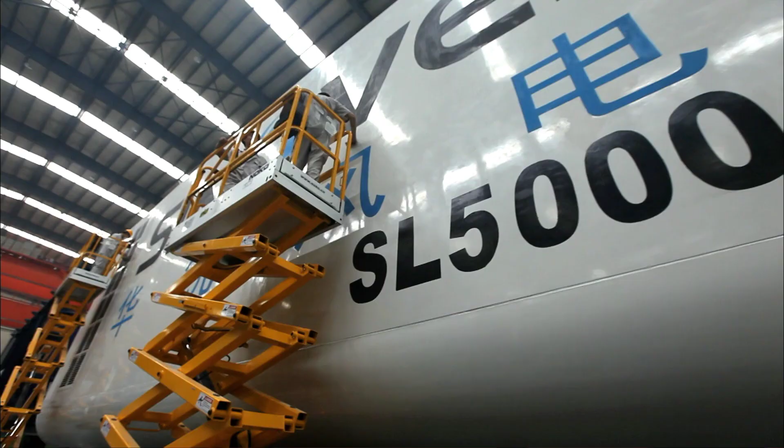Its cabin can be a helicopter pad. Its wind turbine rotor is over 40 stories high. When it's in operation, it doesn't need any fuel, and it won't cause any pollution. In its 20 years of designed lifespan, it will obtain 400 million kilowatt-hours of electricity from the air. This all hinges on it successfully being made and its ability to take on the test of nature.

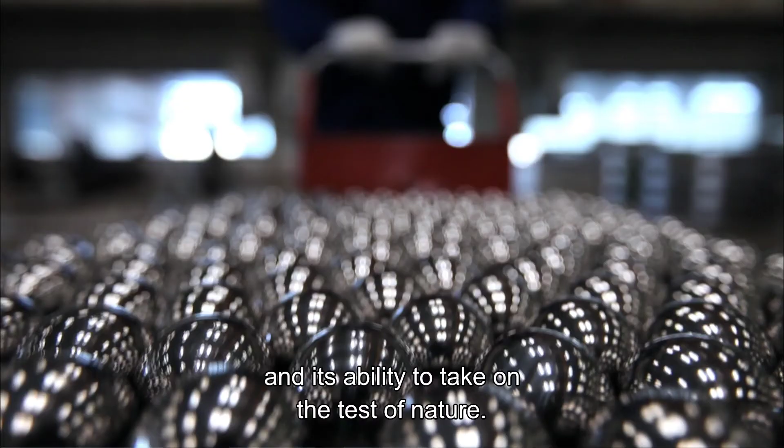This is the giant of wind turbines. Manufacturing it alone has presented all sorts of problems. Installing it during typhoon season on the tumultuous sea will be an unprecedented challenge.

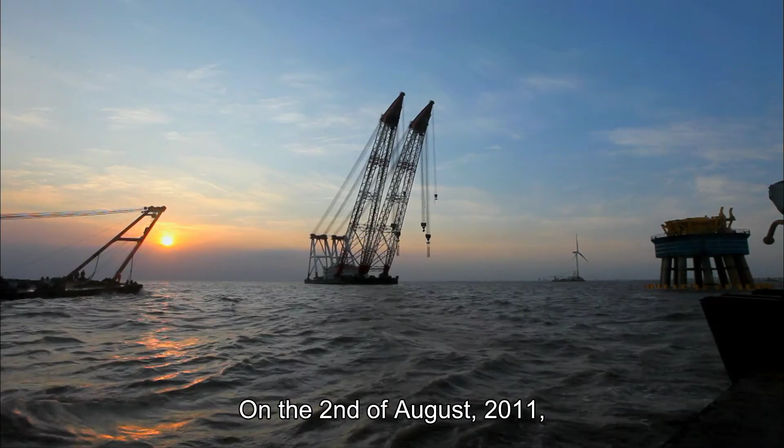On the 2nd of August 2011, on the Sea of Hangzhou Bay, Shanghai, an enormous shadow appeared. This was China's biggest double floating crane, the Fengfan. 38 nautical miles out, on Yangshan Island, China's largest self-propelled crawler crane has been waiting for a long time. Together, they would be challenging an unprecedented installation.

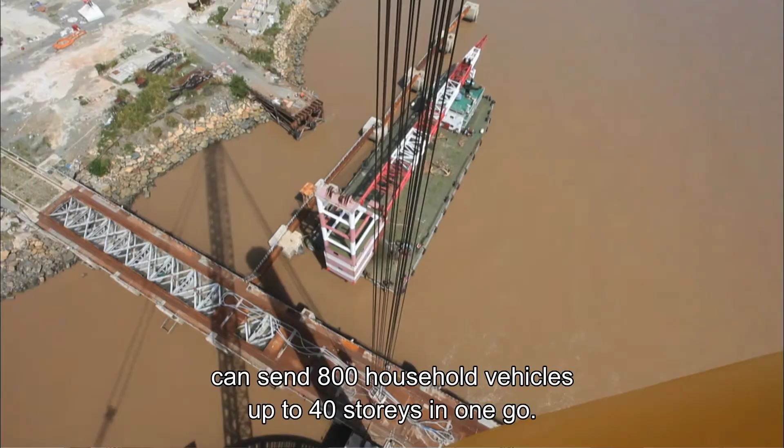Zheng Xijie, the operator for China's largest crawler crane. This is a self-propelled crawler crane that is worth as much as a Boeing 737. Its 9,000 horsepower engine can send 800 household vehicles up to 40 stories in one go. Despite his confidence in the crane, Zheng was still feeling a little nervous about this upcoming challenge.

Zheng's crane and the Fengfan would be installing the world's biggest wind turbine, the SL5000, in the waters of Hangzhou Bay during typhoon season. The roiling waters and unpredictable ocean wind would be the biggest enemies of this challenge.

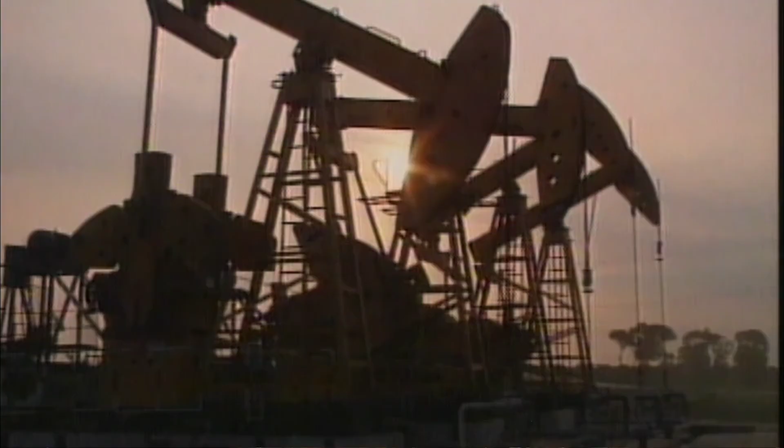Since the Industrial Revolution, the accelerating trend of dwindling petroleum and coal resources has become increasingly obvious. At the rate that it is going, these non-renewable energy resources will soon be depleted. The anxiety over energy depletion has already spread.

Today, developing applicable technology for renewable energy is a priority for mankind. And this demand is particularly high in China, where the economy is under rapid progress.

In 2009, the Chinese started to develop the highly difficult offshore wind power near Shanghai. A year later, the biggest offshore wind power plant in Asia appeared to the east of Donghai Bridge and successfully connected to the grid to generate power before the Shanghai World Expo.

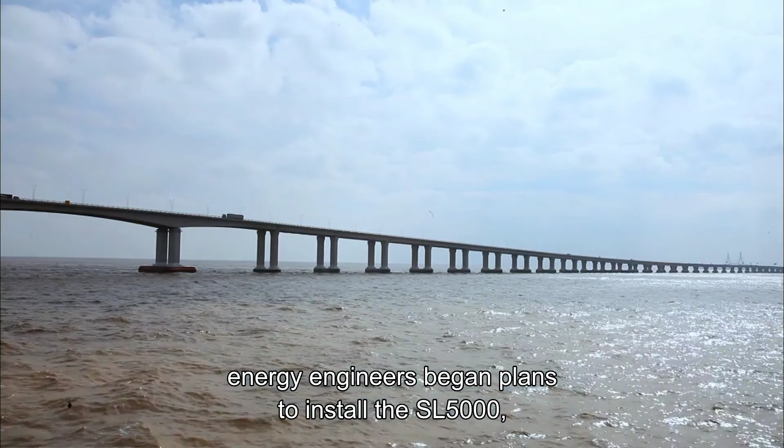However, the ambition of the Chinese didn't stop there. In the summer of 2010, energy engineers began plans to install the SL5000, the world's largest offshore wind turbine, on the other side of Donghai Bridge.

The SL5000 has an enormous body. The top of its engine room can be used as a helicopter landing pad, and its wind turbine rotor has a diameter of 128 meters. Such an enormous size would present an unprecedented challenge for the engineering team, both in manufacturing and installation.

According to their plans, the various components for the SL5000 would be produced in different provinces in China and finally transported to the installation base near Yangshan Port, Shanghai, for assembly.

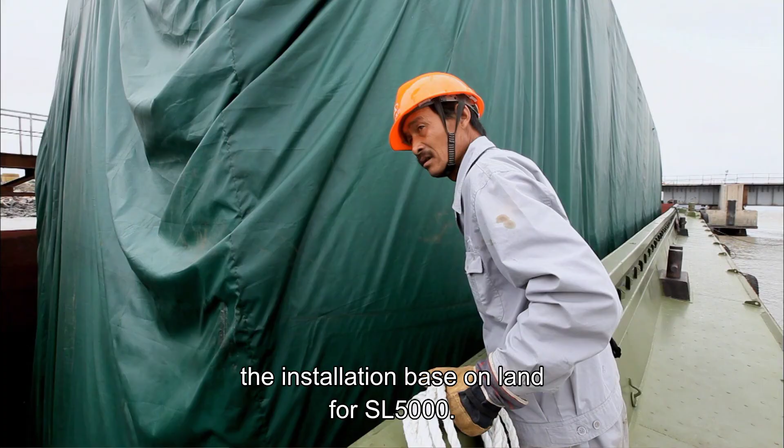August 5th, 2011, the installation base on land for SL5000. The freighter transporting the engine room and the semi-submersible for transporting the SL5000 have arrived at the same time. Based on the information from the meteorology department, the 9th typhoon of 2011, Meihua, had turned into a super typhoon two days before and was heading in this direction.

They must transfer the engine room somewhere safe as soon as possible, while getting the semi-submersible into harbor.

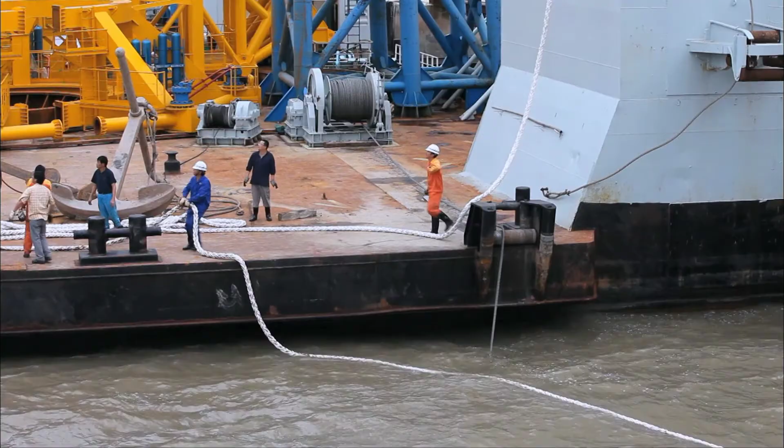To ensure the safety of the gigantic SL-5000 in the transportation process, the engineering team chose to use a bigger semi-submersible than usual. But this decision caused the size of the harbor to become a problem. Two months before, the harbor was completely revamped for this purpose. Now it could just manage to fit in the semi-submersible.

On the other end of the worksite, the engine room remained where it was. At that moment, the weather was deteriorating fast. Are the handles up? The handles are up.

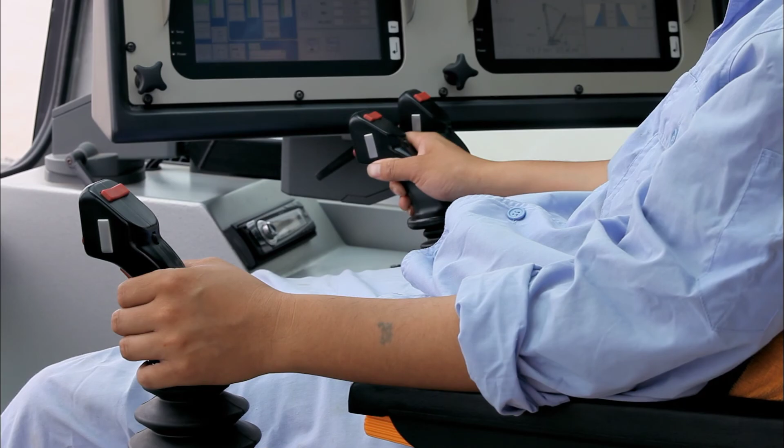Jung assessed the wind situation and activated the 9,000 horsepower engine. Lifting the over 300-ton engine room to transfer it to the railcar isn't difficult for the experienced Jung. But the wind by the sea has already left a deep impression on him. He can't help but be worried about the upcoming official assembly and installation.

Let's go back to early 2011. After half a year of intense collaboration between various departments, the design for the giant of wind turbines, the SL-5000, was finally complete. Soon, the leading companies in the wind power industry together accepted the challenge of manufacturing this giant.

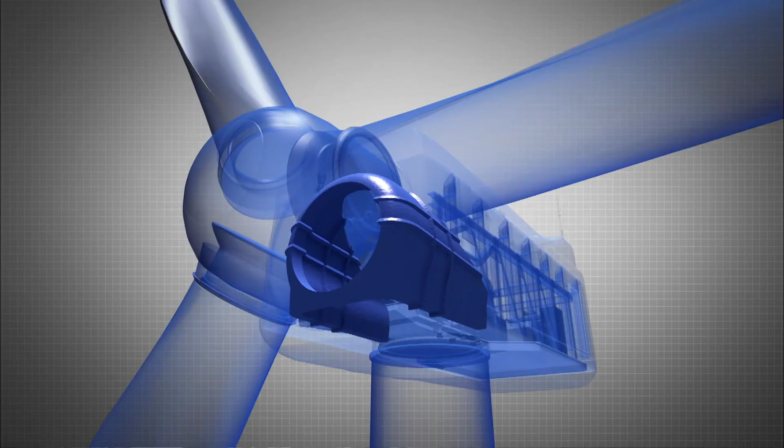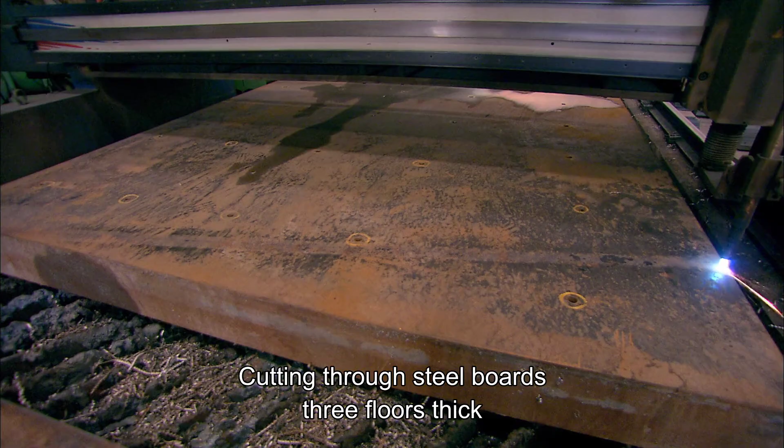To manufacture the large-scale extra-thick steel boards, this heavy-duty cutting machine was necessary. This flame, over 3,000 degrees Celsius, cuts through steel boards like tofu. Cutting through steel boards three floors thick is not this cutting machine's greatest strength. It can precisely cut out any shape designed by the computer.

Its precise control over any discrepancy in the cutting process laid a good foundation for the welding to come. The SL-5000's main frame must be able to support the enormous torque created by the longest wind vane in the world. The quality of the welding must be strictly examined.

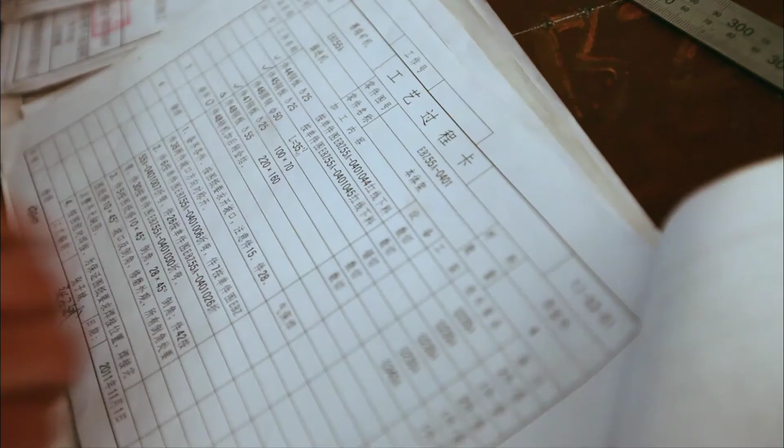The greatest threat to the welding quality was the residual air bubbles at the welding points. Any excessive air bubbles would greatly weaken the mainframe, causing disastrous results.

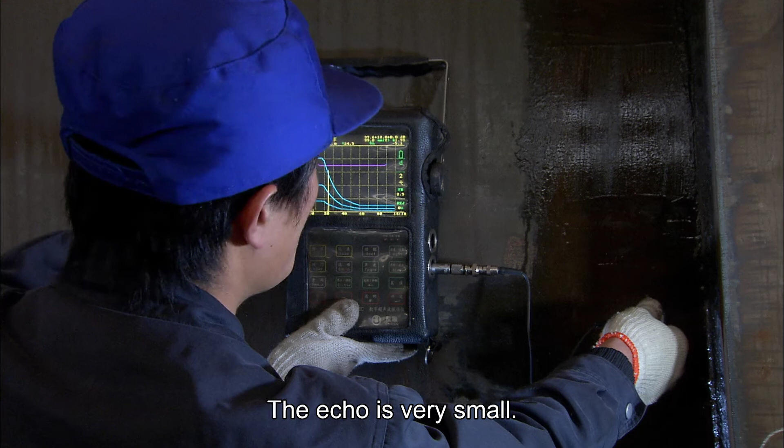This is an ultrasound detector. It is used to examine the interior of metal objects. In order to ensure the quality of the main frame, the detector is tuned to the most sensitive setting. Look, there's an air bubble here, an echo. That shows there's a flaw in the welding bead. When we decrease it by 12 decibels, the flaw becomes very small. The echo is very small, so this passes examination.

All the welding points of the SL-5000's main frame must pass an examination process to ensure it can support the wind turbine, faced with various difficulties in the natural environment.

In creating the biggest wind turbine in history, the completion of the main frame was only the start of this difficult task. More difficult challenges lay ahead.

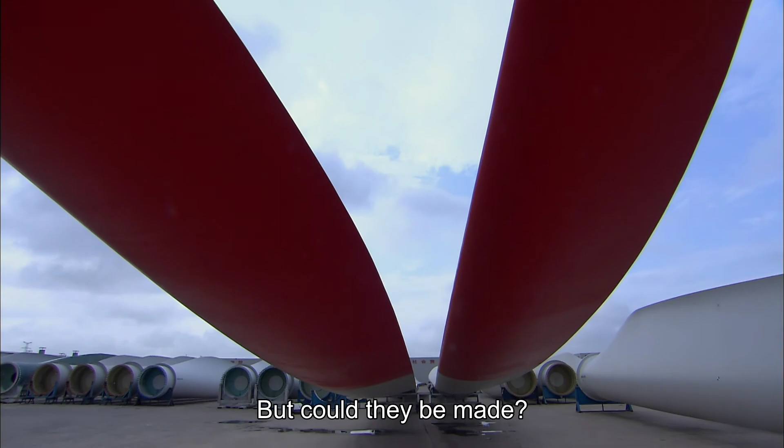To power the large-scale power generator inside SL-5000, wind vanes of unprecedented dimensions were designed. But could they be made? The biggest wind vane manufacturer in China took on this challenge.

Sixty-two-meter wind vanes. We've never manufactured this before, and there's no past cases to refer to. We can only rely on theoretical calculations. No matter the specifications and shape of the vanes, we must meet two basic requirements: the greatest strength and the smallest weight. Yet these just happen to be two conflicting requirements.

Like all design engineers in the manufacturing industry, project manager Dr. Liu Yong must find a balance between these two requirements.

Abnormally strong wind is something wind turbines often face. If the wind vanes are subpar, the result will be disastrous.

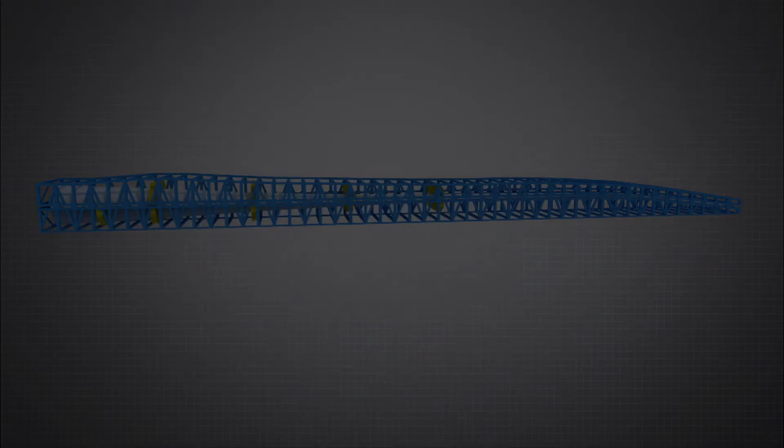The wind vanes for the SL5000 were the biggest, longest wind vanes currently in commercial use in the world. This meant the strain it would be under would also be the greatest. What material could be used to make the vanes to satisfy the demanding conditions?

In the end, the scientists managed to find the ideal material, epoxy resin. After solidification, this material is extremely stable, both chemically and physically. Its only weakness is its tensile strength, which means it is too brittle.

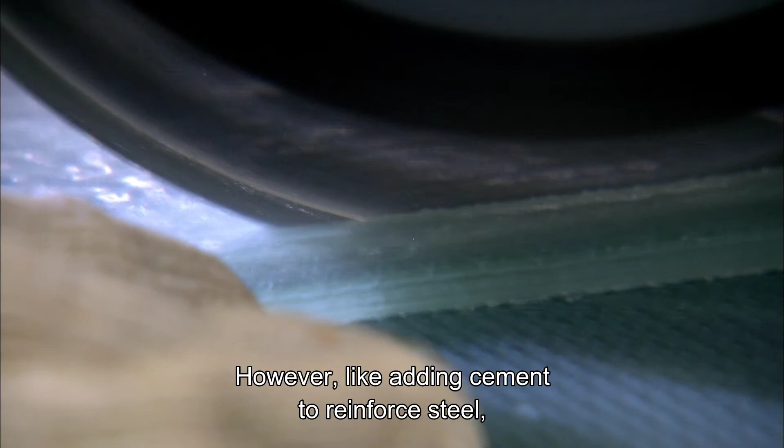However, like adding cement to reinforce steel, scientists added certain braiding to the epoxy resin to create a compound material. This compound material was what we usually call fiber-reinforced plastic, or FRP. How would this added braiding change the property of the resin?

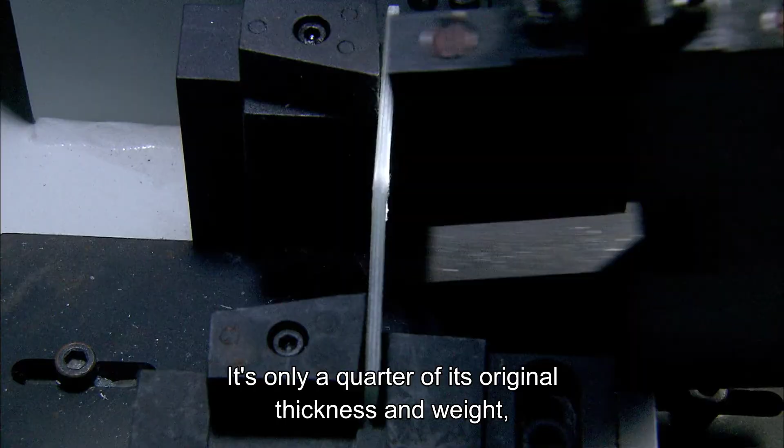It's only a quarter of its original thickness and weight, but it is more than 10 times stronger. Seems like FRP was the best material for making SL5000 wind vanes.

Wind vanes for wind turbines come in irregular shapes. Only then can they perform to their best in terms of aerodynamics. However, the irregular shape, added to the extremely large size, has created two difficult factors that make manufacturing exponentially more difficult.

The most reliable way to confirm if the manufacturing met the design requirements would be to manufacture a wind vane sample for testing as soon as possible.

Six months later, with the help of computers, a wind vane sample was successfully manufactured. However, was it the perfect wind vane everyone was expecting?

The eastern coastal area, centered around Shanghai, is one of the fastest growing regions economically in China. With such rapid economic development, there is great pressure on energy supply. Constructing a large-scale power plant that uses fossil fuel, however, would cause serious environmental problems. Today, clean energy with much advancement in technology provides an alternative in resolving this dilemma.

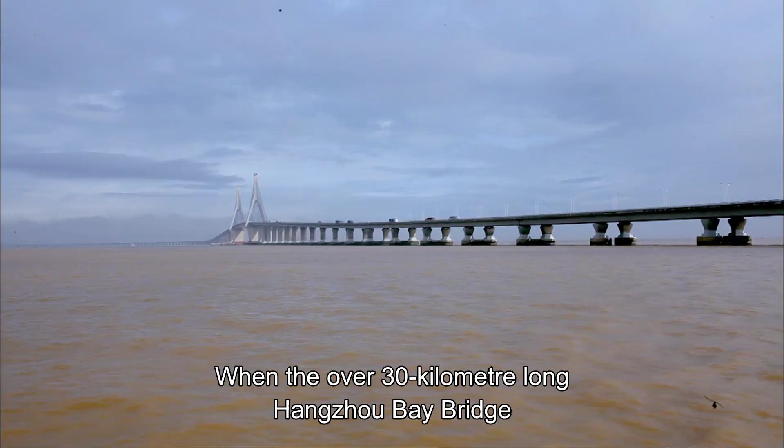Yangshan Islands used to be a cluster of deserted islands on Hangzhou Bay to the south of Shanghai. Since 2005, this has been made into a large-scale seaport. When the over 30-kilometer-long Hangzhou Bay Bridge connected to the mainland, Yangshan Port was transformed into a world-class deep-water cargo port.

As Yangshan Port was being effectively developed, people also noticed another abundant resource there: the sea wind. The wind here could reach up to 300 watts per square meter, for persistent periods of time. With such excellent wind resources and such proximity to where energy was being expended, Hangzhou Bay seemed like the ideal site to build a wind power plant.

However, this is also within the affected area of the West Pacific monsoon. For several months each year, it is ravaged by typhoons. Installing supersized wind turbines here meant more than just the challenge of wind and rainstorms. Any overlooked factor could create disastrous results when faced with such harsh conditions.

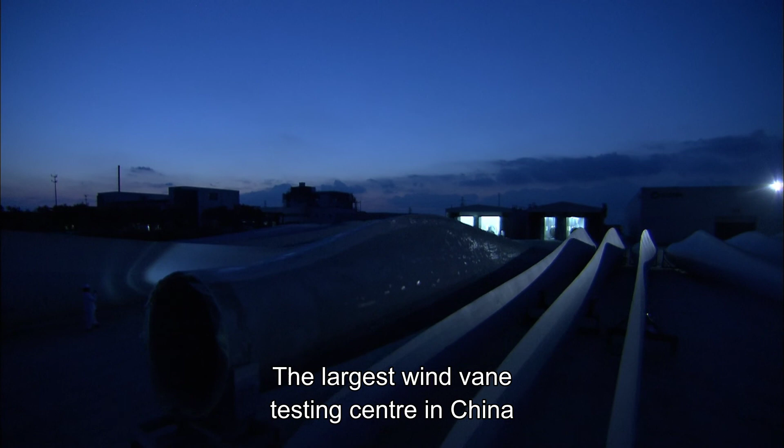The quality of the wind vanes was vital. The largest wind vane testing center in China conducted the strictest tests on the wind vane sample.

Would all the efforts poured in prove to be futile? Could the sea giant, the SL5000, be born as scheduled? It all depended on the test results.

How could any minuscule change be detected in the process of the wind vane testing? The answer was here. Before testing started, project manager Dr. Liu stuck stress sensors on various parts of the wind vane. During the testing process, the tiniest damage to any point on the wind vane would be detected by the computer through the stress sensors and recorded.

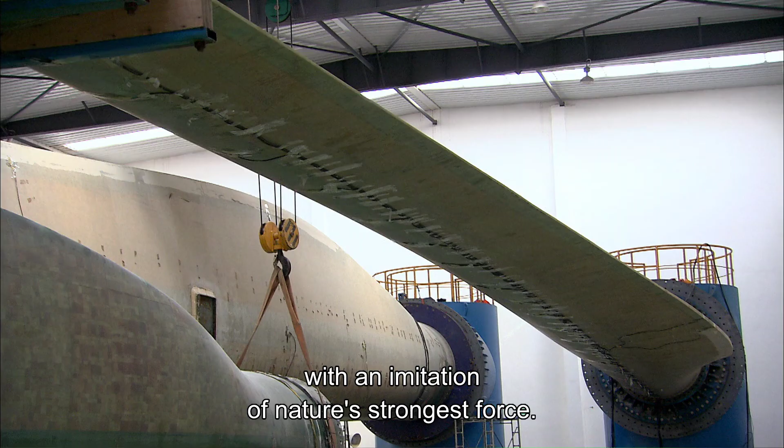The laboratory would be testing the wind vane with an imitation of nature's strongest force. When the red light came on at the door, no one could enter the site.

Over a standard 20-year lifespan for a wind vane, it experiences about 4 million oscillations. In our process, under the same load, we subjected it to 5 million. To ensure there would be no problems in actual operations, Dr. Liu increased the standards for every experiment.

Now the wind vane has been oscillating for 6 straight days. It's at about 250,000 oscillations and will end when it reaches 5 million.

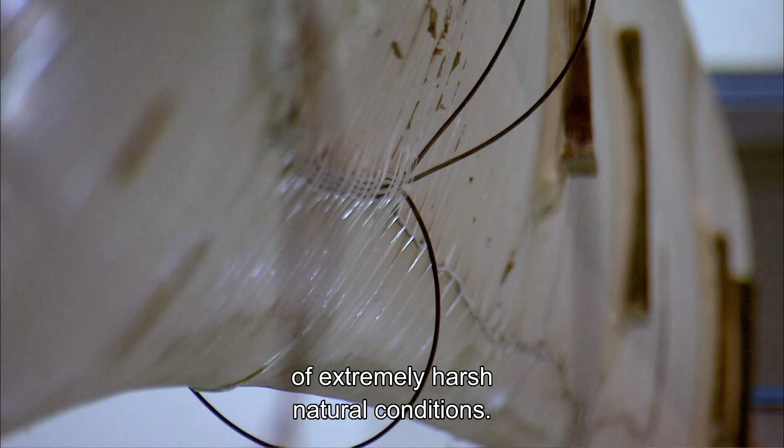4 months went by. After a complete set of tests, the wind vane would have been subjected to an equivalent of 20 years of extremely harsh natural conditions. It is time to check for any internal damage.

From the results of the examination, the vane's internal structure appears to be in perfect condition. Dr. Liu's hard work these few months have not gone to waste. 3 days after the testing came through, the first SL5000 wind vane was demolded.

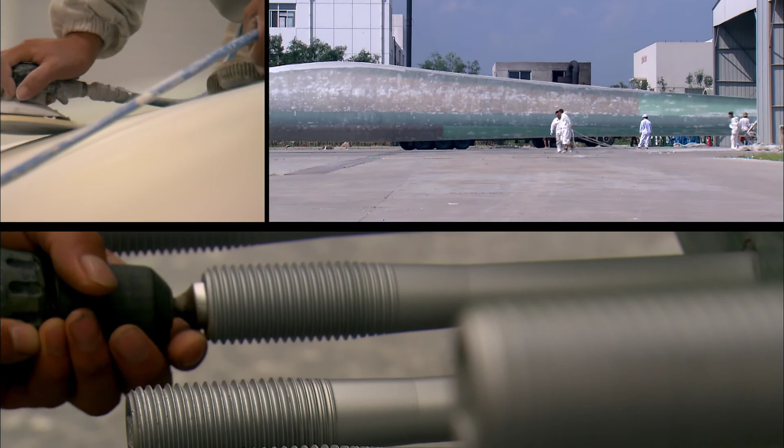August 30th, 2011, Yangshan Island. Site manager and engineer Mr. Qiu was in a particularly good mood. The 5-megawatt wind turbine and the SL5000 wind vanes were finally delivered the day before.

Due to uncontrollable factors such as the weather, the installation progress of the SL5000 was already far behind schedule and was almost past the leeway afforded by the set schedule. Currently, the equipment rent and staff cost every day come close to $100,000. If they could start assembling work today, the over-budget issue wouldn't be too serious.

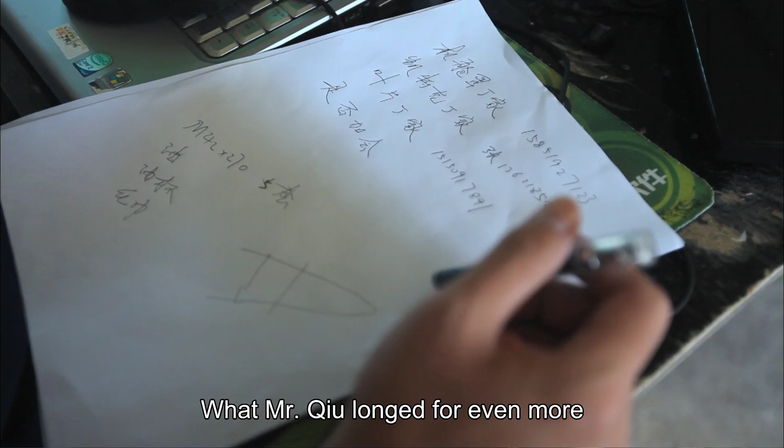What Mr. Qiu longed for even more was 2 weeks of vacation back home in Beijing, once the final assembly work was complete. After living on the work site by the sea for almost half a year, Mr. Qiu felt like his entire body was rusting.

Assembling the wind turbine started with the wind vanes. There was only one priority here: to ensure the wind vanes don't bump into anything. Any internal damage caused by the slightest jostle could develop into a major flaw as time went on, rendering the vane unusable.

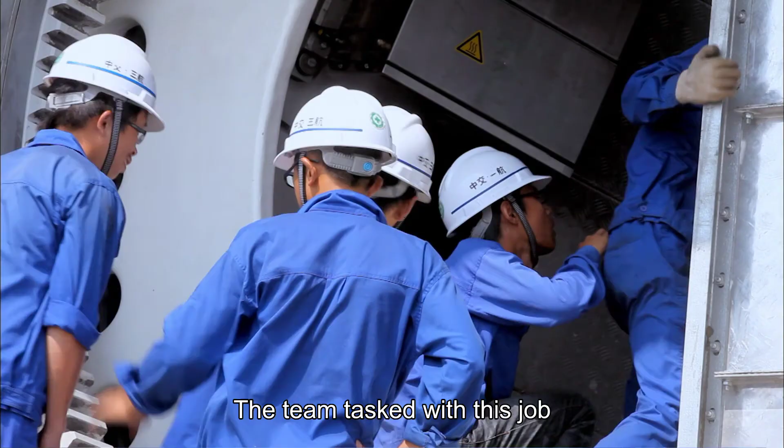The team tasked with this job was the most experienced professional offshore wind turbine installation team in China. However, soon after the installation started, they ran into difficulties. Faced with such enormous vanes for the very first time, following previous procedures might present certain risks. No one dares to be careless.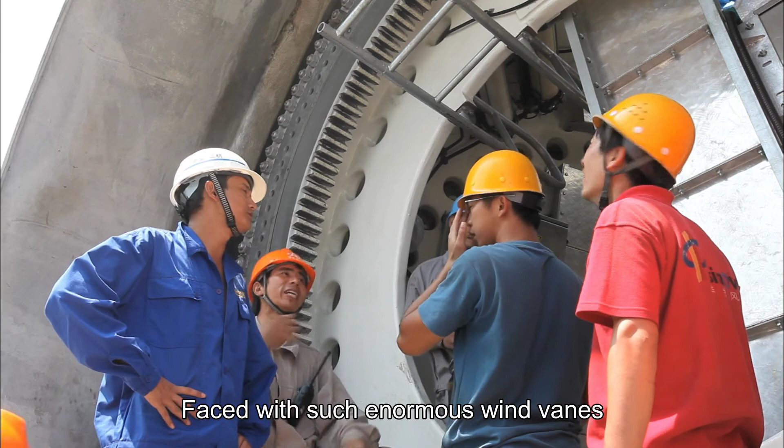What is the influence? As site manager, one must assess sudden situations quickly and make decisions accordingly. Faced with such enormous wind vanes with no past experience to draw on directly, after brief consideration, Mr. Chu agreed to employ the new installation method.

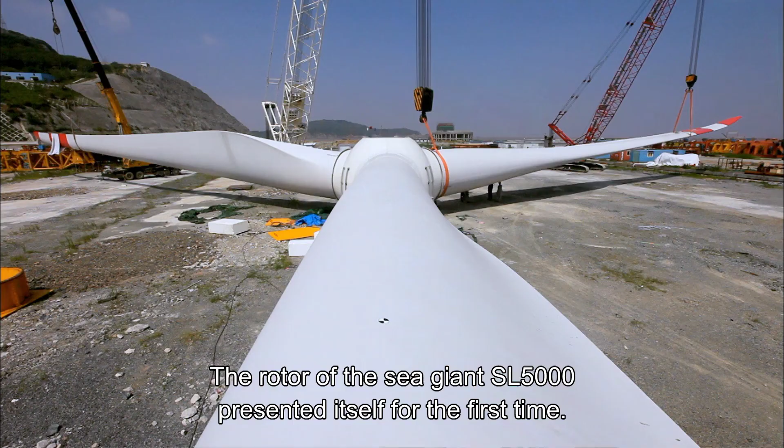The new installation method worked. The 3 wind vanes were smoothly installed. The rotor of the Sea Giant SL5000 presented itself for the first time.

The infinite power of wind is nature's gift to us. It is green energy that will never run out.

On this front, humans continuously issue new challenges to the application and difficulties of wind power technology. On the Chinese market, a 5-megawatt wind turbine could obtain electrical power worth over 400 million renminbi from thin air, without expending any energy.

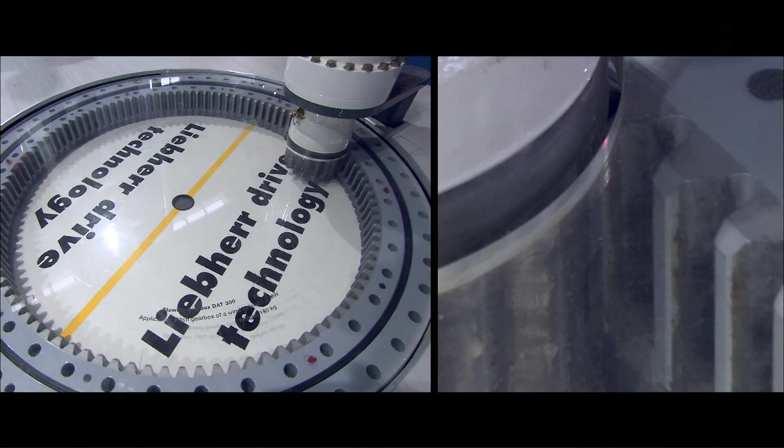However, the prerequisite to these benefits is that the SL5000 could hold on for 20 years or more at sea with harsh natural conditions. In case major components, such as the bearings, need to be replaced while it is in operation, the hope for profit will be gone.

Bearings have to withstand force and be in action, and are thus the easiest to be damaged. The bearing that the SL5000 needs will be the most difficult to make in the history of bearing manufacture. To date, only 3 factories in the world have the capability to take on this challenge.

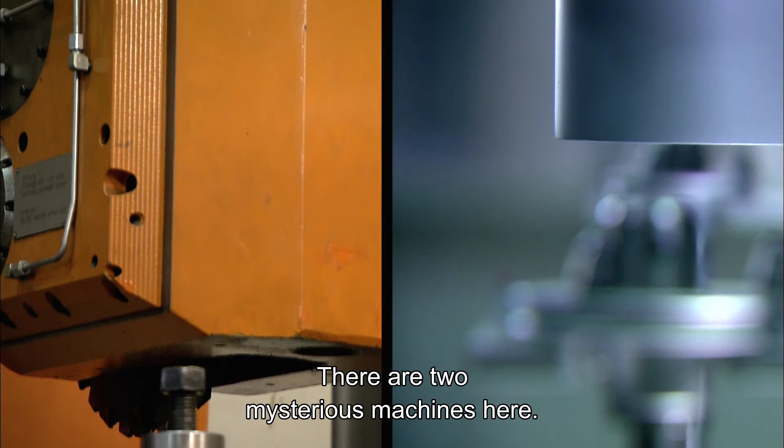On the map of China, Wafangdian is a county-level city that can barely be called a city. There are 2 mysterious machines here. They are the most powerful and precise monster machines that mankind has currently made. Their existence has given humans enough confidence to face the difficulties met with making the SL5000.

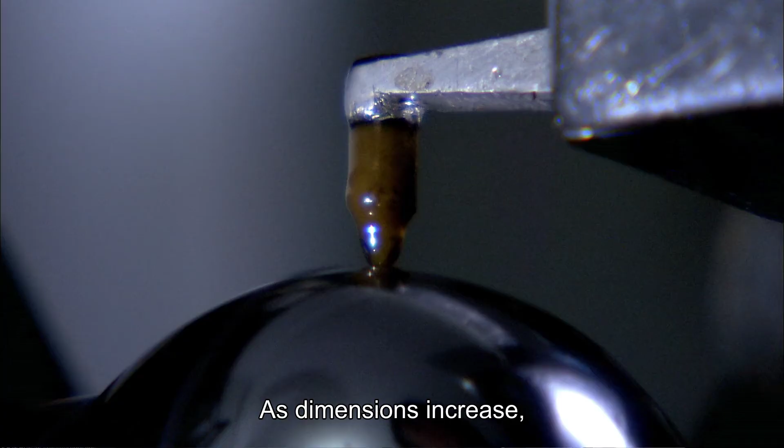In layman terms, a bearing is a circular, high-speed, closed orbit. Its every detail must be extremely smooth and even. A precise bearing has very strict standards on smoothness and evenness. As dimensions increase, the difficulty in ensuring these precise standards are met also increases exponentially.

Giant wind turbines like the SL5000 require an enormous bearing for support. And in fact, this bearing was a precise bearing with the largest dimensions in the history of bearing manufacture. To make this, the most advanced processing equipment currently must be used.

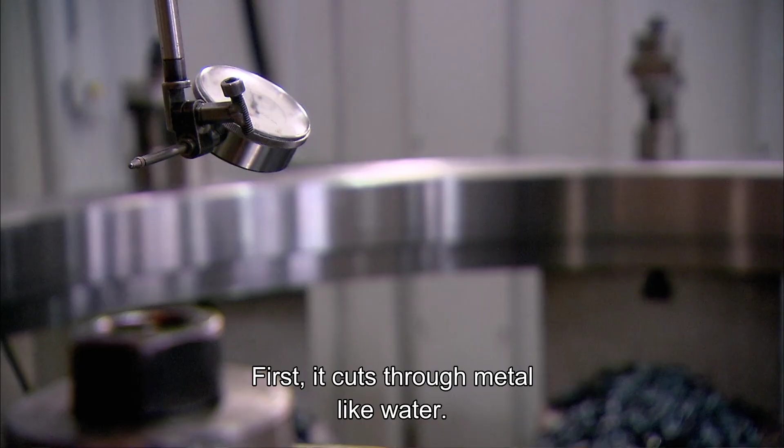First up was this heavy-duty milling machine. This is the most precise large-scale metal component processing equipment in the world. It has 2 unique functions. First, it cuts through metal like water. Second, it can process components over 3 meters in diameter with a margin of error in microns.

The material used for the bearing is 5 times as hard as a stainless steel cleaver like the one used at home. And this machine only takes 45 seconds to cut a deep trough in this material.

It has been 3 hours. The components of one bearing have been processed.

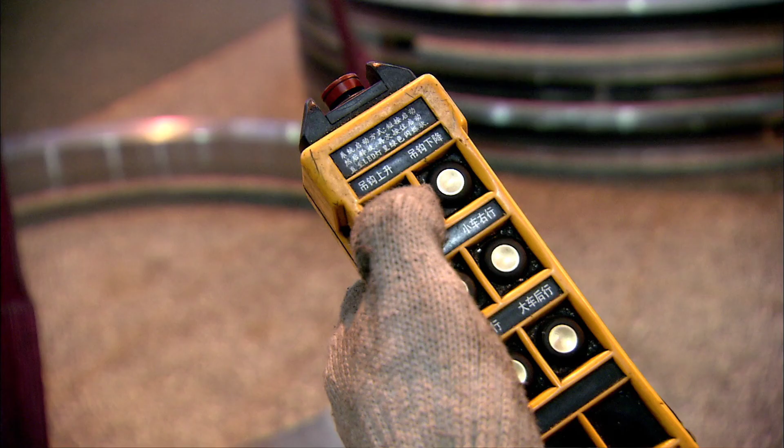As the bearing rotates at high speed, any minuscule flaw could be exacerbated rapidly. The bearings must be tested. Traditional testing methods on what could cause serious damage to bearings are no longer good enough. It was time to bring out another monster machine.

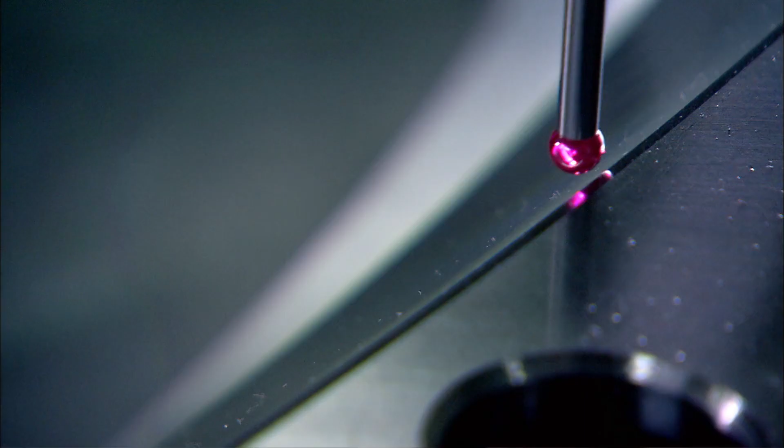This is the world's largest 3D precision detector. To ensure all detector sensors are hard enough and that detection standards are at the micrometer precision, all its detector sensors are made of expensive rubies.

The detection range of this detector exceeds 3 meters, with a detection precision of up to 0.8 micrometers. To use a more visual metaphor, on a completely flat piece of land 3 kilometers in diameter, if anywhere there was a protrusion the height of a grain of sand, the detector would find it.

The SL5000's main bearing has a diameter of over 3 meters. But the margin of error in the processing of this huge bearing must not exceed 6 micrometers. How can we visualize 6 microns? It's actually approximately a 20th of a strand of human hair.

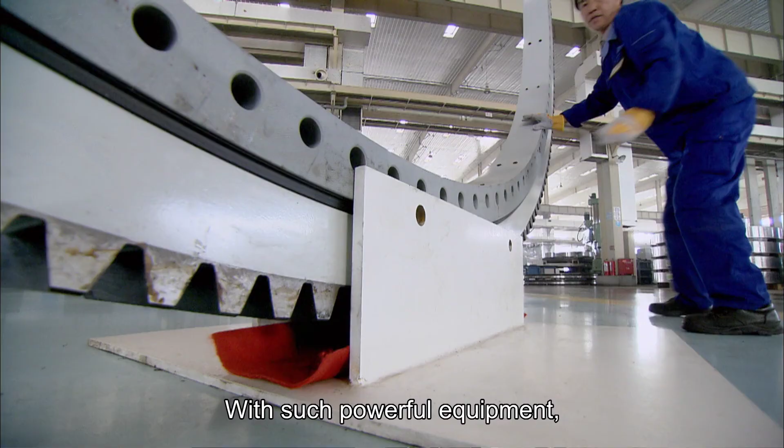With such powerful equipment, all the bearings of the SL5000 were finally manufactured. Among them, the biggest bearing was 2 stories high. It was to be installed at the base of the engine room. With it, the sea giant SL5000 would be able to turn as it pleases in the direction of the wind.

Alternating current, AC, is an electric current where the voltage and direction of current flow undergoes cyclical changes. It is one of the greatest human inventions made over 130 years ago.

However, when AC was just invented, no one understood what it meant for the future of humankind. The great inventor, Thomas Edison, was strongly against AC. To this end, he employed various tactics and even gave his assistant silent approval to electrocute an elephant to death so he could prove the danger of this current.

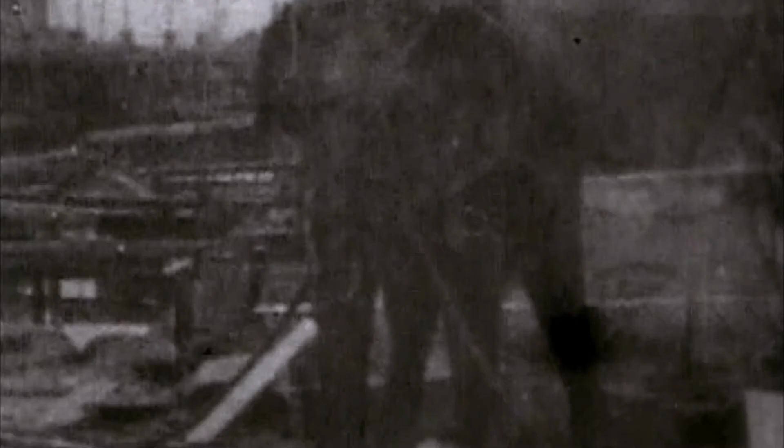Edison's experiment just seemed to indicate the power of AC. As the advantages of AC were discovered one by one, humankind rapidly entered an age of electric power. Today, human life is intertwined with AC, which has become the basic force empowering our society.

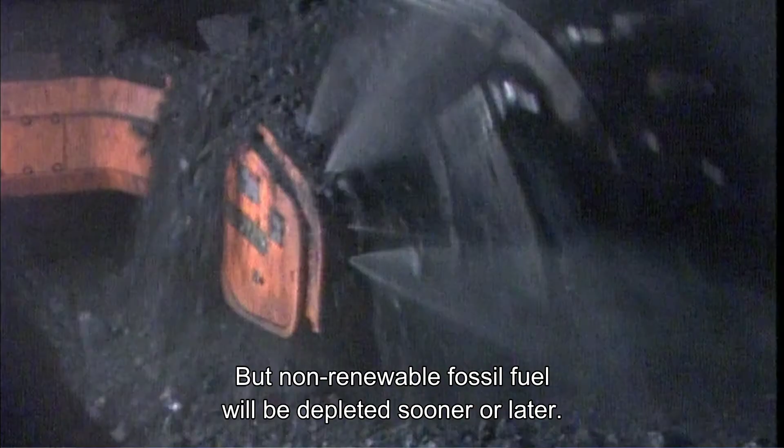Due to this, we continuously look for different ways to satisfy the demand for this energy. The burning of fossil fuel to obtain energy is the most convenient option, but non-renewable fossil fuel will be depleted sooner or later. And pollutants released from burning fossil fuel have been proven to be the culprit behind many ecological disasters.

As technology advanced, mankind gradually mastered various ways to obtain clean energy, from hydropower, nuclear power to wind power and solar power and more. However, to date, none of these alternatives have been proven yet to be the perfect solution.

Of all the clean energy currently explored and in use, wind power has, as far as we know, the least impact on the environment.

Raise the anemometer. All right. Is that high enough? Raise the wind tower.

Wind power doesn't cause any pollution, will never run out, and is abundant. At a rough estimate, the total capacity of wind power in the world is 3 times that of the world's total energy consumption, which means if we could make full use of all wind power, it could power 3 Earths.

Yet the reason wind power can't become the major source of energy lies in how arbitrary the wind is. The arbitrariness of wind is an inherent flaw in wind power. Intermittent power cannot be directly used by humans in life and production.

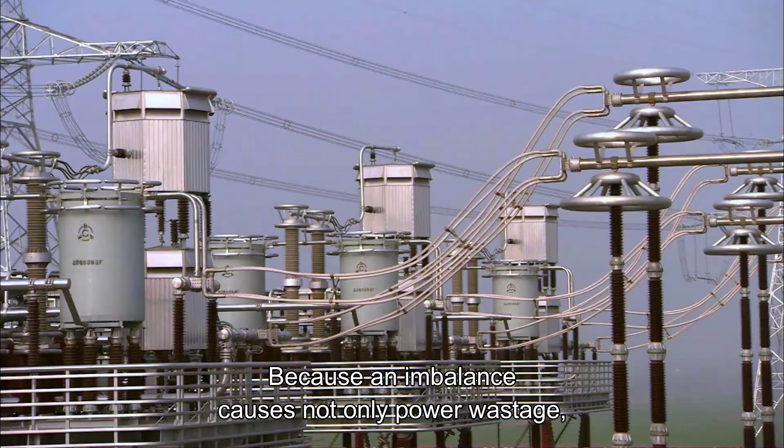The biggest feature of usable energy sources is that power generation and consumption occur simultaneously. The goal of a power grid is to maintain as much as possible a balance between power generation and consumption, because an imbalance causes not only power wastage, but on a more disastrous level, the collapse of the power grid.

The intermittence in wind power, which cannot be overcome, would certainly exacerbate the imbalance between power generation and consumption. Without adequate regulating ability from the grid, a major push for wind power could only remain empty talk.

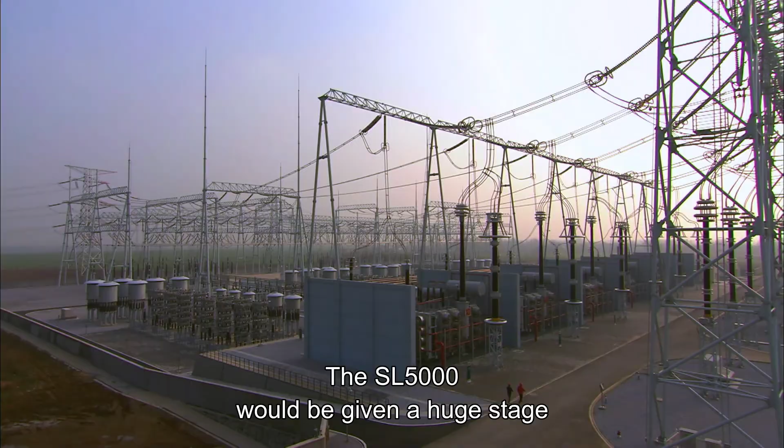Nowadays, cutting-edge technology such as high-voltage DC technology and AI power grid systems have already equipped China's national power grid with powerful regulating capabilities, opening up a bright future for the application of wind power and other renewable, clean energy sources. The SL5000 would be given a huge stage on which to shine as well.

In July 2011, almost a year after design and manufacturing work commenced on the SL5000, the mainframe, transmission, power generator, and other major components had all been installed into the engine room and tested. The SL5000's engine room was finally ready to be launched.

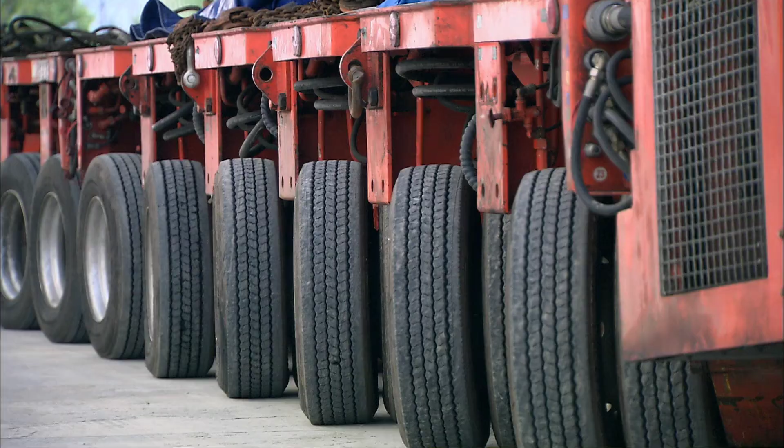The SL5000's engine room was finally ready to be launched. It was then loaded according to plan. The drive out of the factory was a smooth one. The flatbed truck, transferred from over 400 kilometers away, may look ordinary, but it has special functions. Every set of its wheels can be controlled independently.

Three hours later, the SL5000 reached its final destination on land. The freighter waiting here will transport it to its final site of installation, Yangshan Port.

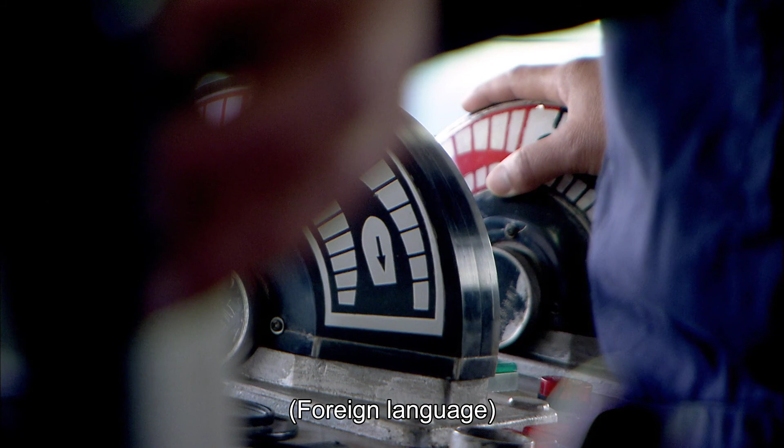Installing wind turbines at sea is an extremely dangerous engineering challenge. On the Sea of Hangzhou Bay, the difficulty of this challenge is exponentially higher. The current here is rather fast, close to Hangzhou Bay, so the current here is relatively faster than most places.

The biggest enemies when working at sea come from the wind, waves, and unpredictable weather. Sometimes, the sky may be sunny and clear, but it is another story at sea.

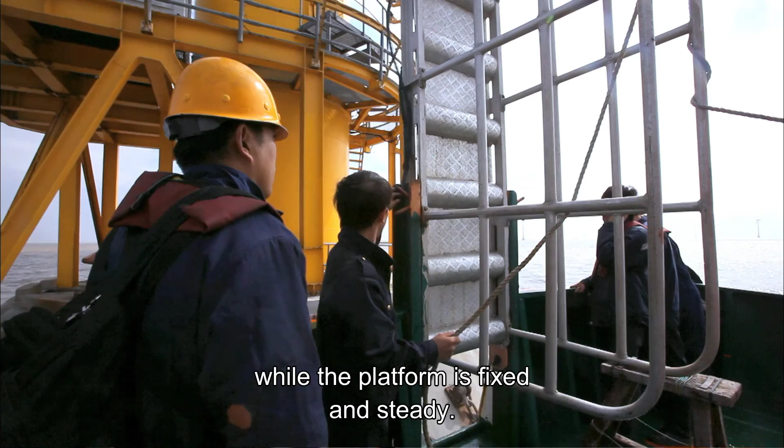The danger of transferring from the ship to the platform lies in the movement of the ship on the waves, while the platform is fixed and steady. On the open sea, this problem is exacerbated.

In preparation for the coming, final, and most difficult challenge, the offshore hoist and installation, monitoring of the hoisting site became even more frequent.

The SL5000, to be hoisted near here, was the largest offshore wind turbine in the world to date. It is over 150 meters in height and 400 tons in weight. If the impact of the waves and wind caused an object of this weight to collide with the fixed platform during the installation process, even the slightest collision could result in unsalvageable consequences.

The challenges presented with installing the SL5000 seem to be extraordinary.

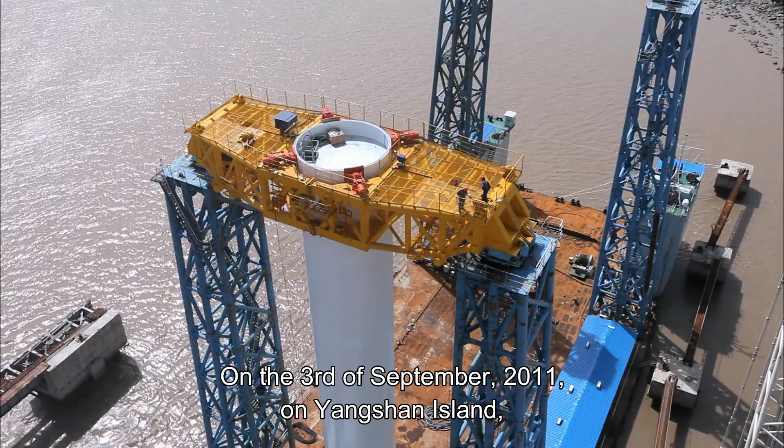On the 3rd of September 2011, on Yangshan Island, the most important procedure in the installation of the SL5000 began. The key step in the installation of a wind turbine lies in the assembly of the wind rotor and engine room. Before that, the engine room must be fixed to a temporary tower top at a pre-calculated angle.

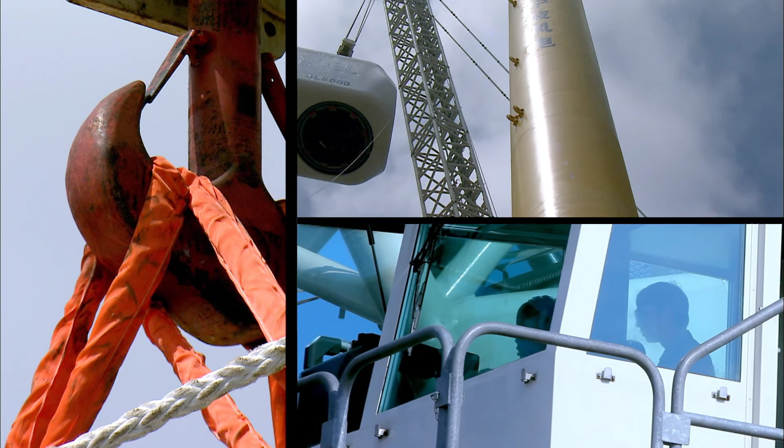Thanks to comprehensive planning and meticulous operation, the enormous engine room was put precisely in its premeditated position. The installation of the engine room demonstrated a good start.

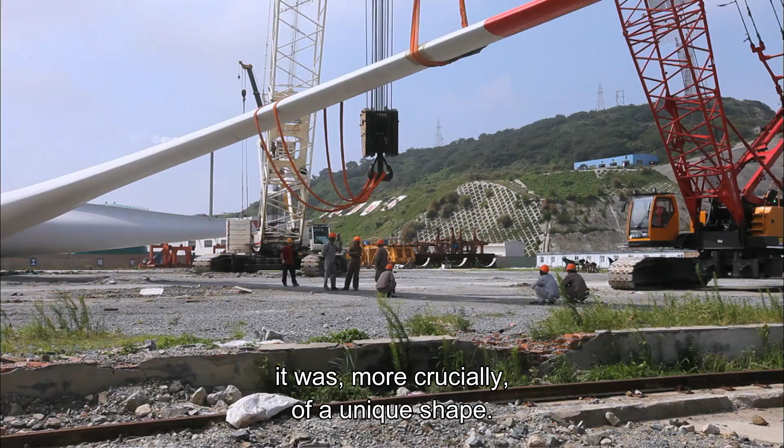It was time to transfer the wind rotor on the square. The transfer process for the rotor contained great hidden danger, because the SL5000's wind rotor was not only big and heavy, it was, more crucially, of a unique shape. Only 2 cranes could be used to lift it horizontally. The difficulty lay in getting the 2 cranes to achieve the perfect balance.

It was over 60 meters in difference between where the cranes were installed to the tips of the vanes. The slightest imbalance from the cranes would be compounded dozens of times in the sway of the vanes. The completion of this task required balance needed to walk a tightrope across 2 cliffs.

The weather, unfortunately, worsened. In the afternoon, the wind grew stronger. The task must be sped up. It was time to put the crane operator's skill to the test. There was no room for any collision.

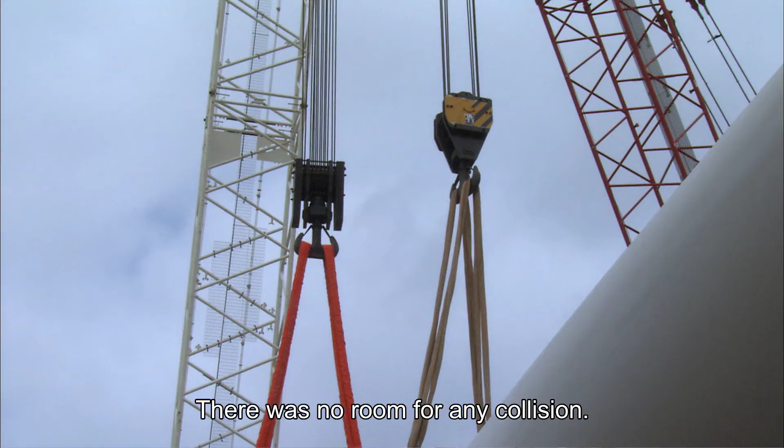Mr. Chu was very satisfied with today's work progress. Faced with the over 128-meter diameter wind rotor, everyone was extremely cautious. However, the scene everyone feared finally happened.

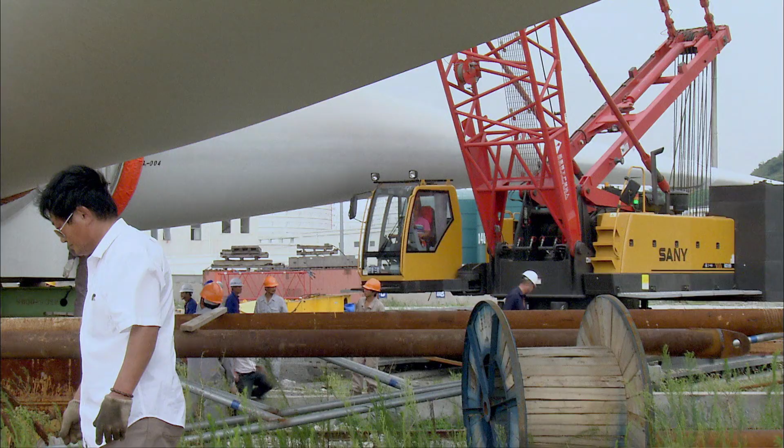Luckily, the crane operators reacted timely, saving everyone's efforts from going to waste. After the false alarm, the real trouble came.

The wind grew even stronger and soon exceeded the limit for proceeding. All installation work was forced to a halt. Based on past experience, unexpected wind like this shouldn't last long, and installation should continue the next day.

However, a new situation came up. News from the meteorology department stated that the atmospheric pressure in the entire West Pacific region was highly unstable and would likely develop into a tropical storm or even a typhoon.

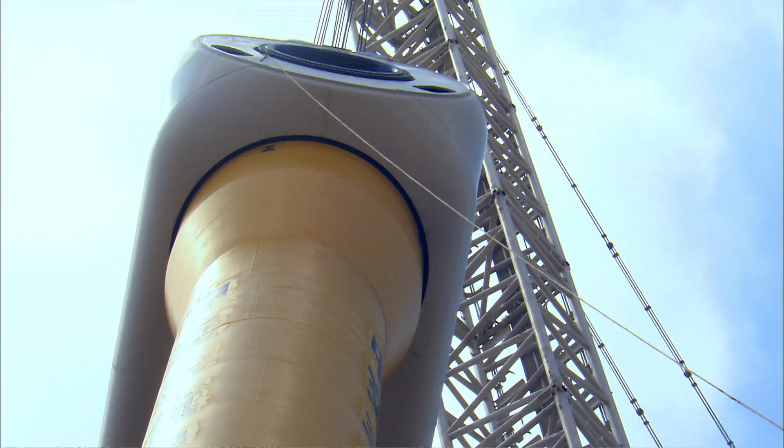The first option was to stop installation entirely. That was the safest way. However, according to safety regulations, the engine room and wind rotor must be returned to their original positions to be restarted when the unstable weather had passed.

That meant the project would be delayed even further. The financial director would definitely be displeased, since the current daily cost was already near $100,000.

The other option would be to continue installation once the wind stopped. The challenge this presented was zero room for any accidents before the typhoon hit.

Mr. Chu was determined to take on the challenge and continue installation, but with a major decision, the final call rested on headquarters.

By nightfall, the headquarters still hadn't made a decision. There was nothing to be done on site except to wait. The engine room was still on the temporary tower top, and this tower was far weaker than the official tower. To prevent any accidents in the night, a crane must provide support for the engine room.

Tonight, Zheng's crane would run through the night.

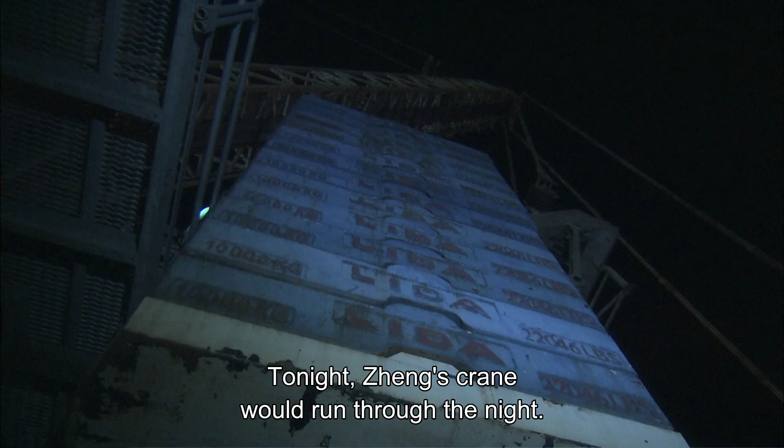Early on the 4th of September 2011, Zheng makes a full inspection on the crane, which had run overnight on autopilot. Apart from a decrease in fuel volume, there were no problems. The wind showed no signs of letting up, and there was no decision from headquarters.

In the last few years, Zheng had installed quite a number of large-scale wind turbines, but none of them could compare to the SL5000 before him. Zheng, who liked challenges, was rearing to go, but all he could do now was wait.

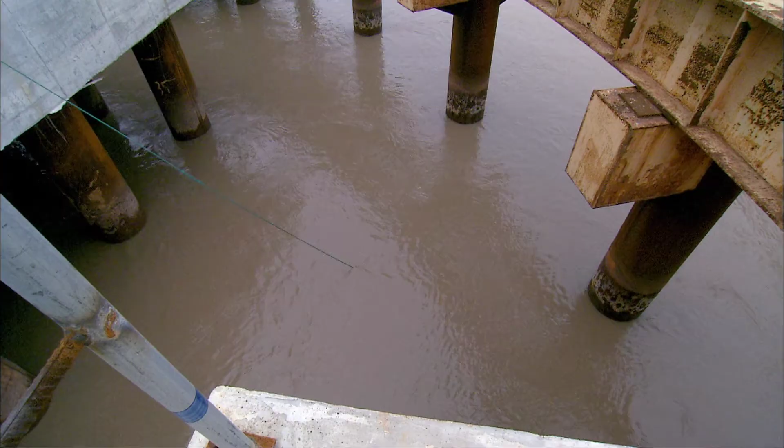Zheng is a man of few words, but he grew up by the sea and knew more about it than most people. His catch today was better than usual, which meant better food for everyone.

Just before lunch, orders came from headquarters to continue installation, but would the wind die down in time? At low tide that afternoon, the wind miraculously weakened. Mr. Chu decided to seize this window of time to start hoisting the wind rotor.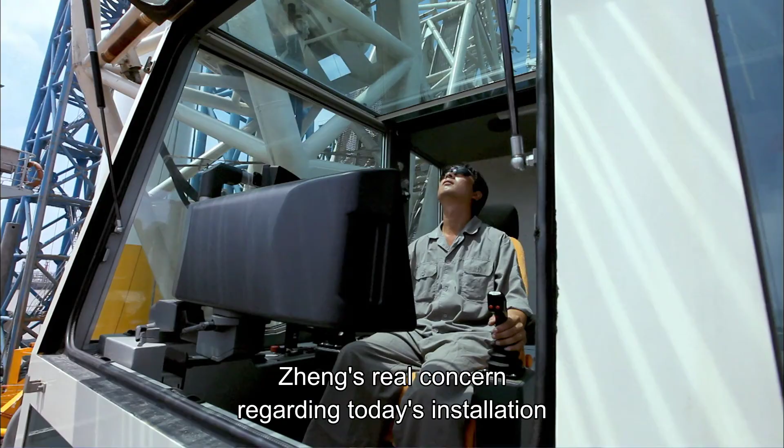Zheng's real concern regarding today's installation was the screws connecting the rotor and the engine room. There are a total of 108 of these arm-thick screws. The challenge in this hoist was to insert the 108 screws on the rotor into the screw holes drilled beforehand in the engine room simultaneously, 80 meters in the air.

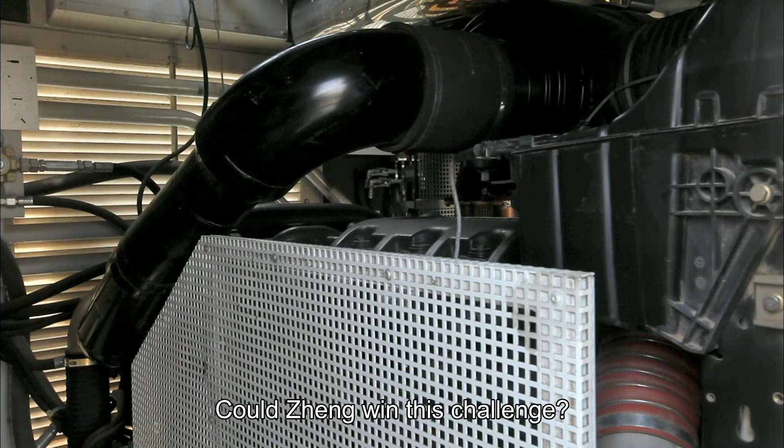At over 80 meters high, the wind just has to be a level or two higher than on land for the gigantic wind rotor to deviate unexpectedly. Could Zheng win this challenge?

Sea wind would gradually strengthen in the evening. The hoist must start quickly. However, there was a problem to be solved before the hardest step of the installation: how to pull the biggest wind rotor in the world upright from its prone position.

The solution was to use 2 cranes to lift the wind rotor to a certain height. Then one of the cranes would slowly release the rotor so that it would become upright naturally. This may sound simple, but there was no room for error in any step.

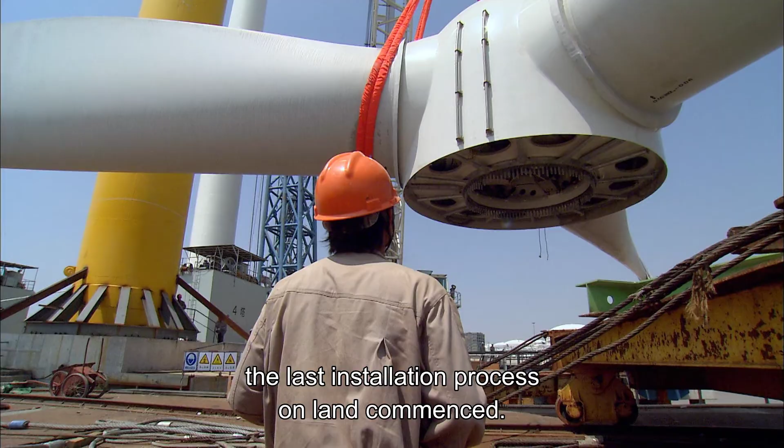At 3 p.m., the last installation process on land commenced. 45 minutes later, the wind rotor was raised to the preset height. One of the cranes backed out, and the rotor hung upright.

The most gripping step of the installation began. The swing of an object is the hardest to predict in a hanging state. However, the wind rotor absolutely must not collide with the engine room, because such collision could result in serious damage invisible to the naked eye. Such hidden damage could be a serious threat to the survival of the wind turbine. The consequences would be unimaginable.

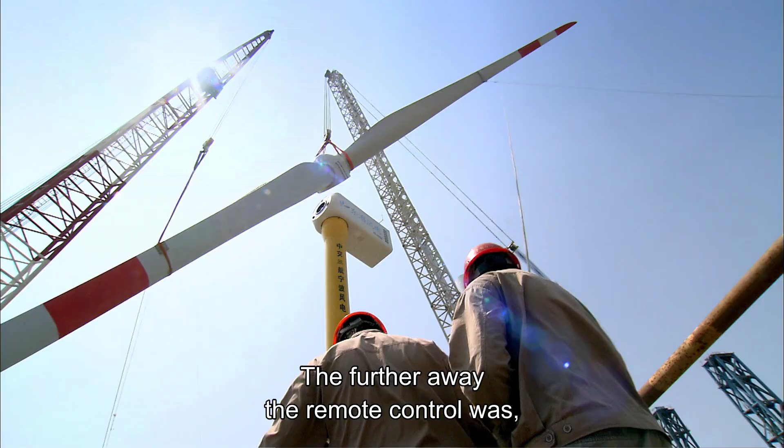The further away the remote control was, the longer the reaction would take. One command from Zheng to move forward would only materialize in the rotor a few seconds later. Zheng must manage this lapse in time. After an hour of precise adjustment, Zheng displayed outstanding skill in control. The giant wind rotor was safely connected to the engine room before dark.

Zheng had good reason to be secretly delighted for a good while. In the dusk, the sea giant SL-5000 stood in front of mankind for the first time ever. To this point, everything was still within control.

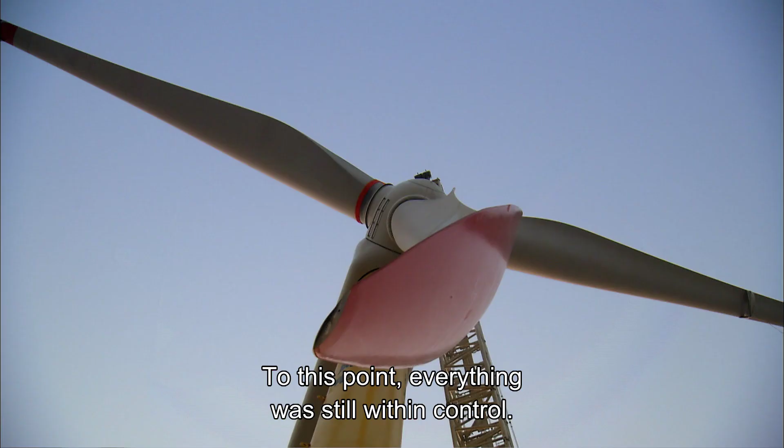On the 5th of September 2011, the sea giant SL-5000 was already locked in place on the semi-submersible. At 9 a.m., the semi-submersible sailed out of the port with the help of several towboats. It was almost 40 nautical miles from the port to the installation site. The SL-5000 arrived at the site just before dark.

After traveling for 8 hours on the sea, the SL-5000 reached its designated position to meet up with the Fengfan, which had been waiting there for 9 days.

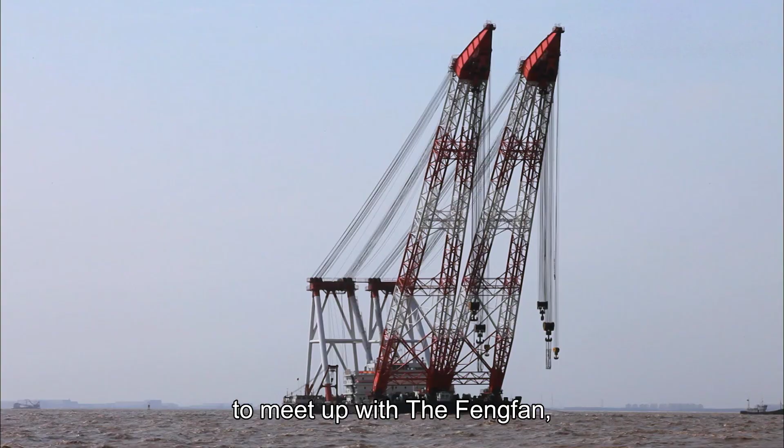On the West Pacific, the 13th typhoon of 2011, Noru, had already taken form for 2 days. The water there was already starting to look murky. There were only 24 hours left in the final stretch of this window of opportunity.

September 6th, 2011. It could be the last sunny day for almost a week. The installation team would spend the entire day facing the most gripping moment in the entire project. 2 years worth of hard work, success or failure, all hinged on this final step.

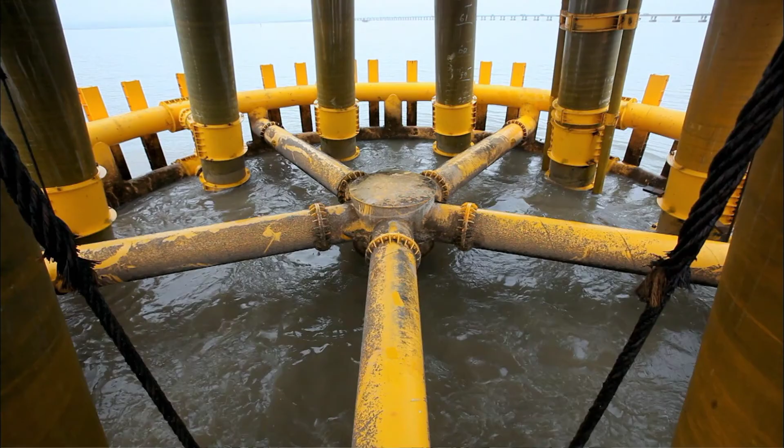Compared to the sturdy base on land, the SL-5000's offshore base would move more easily due to collision. Any slight displacement of the base would become a major discrepancy at the top of the 150-meter-high wind turbine.

Today, if the offshore base was accidentally hit by the SL-5000 and displaced, the entire installation process would be deemed a failure. The status of the base was monitored strictly by special equipment. The SL-5000 must not collide with the base.

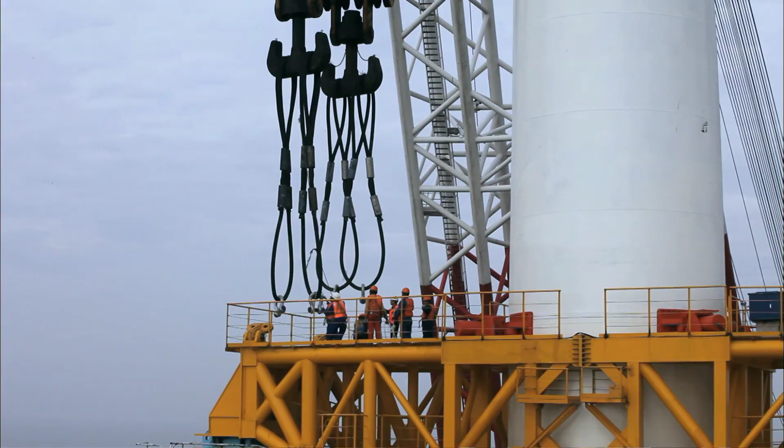The problem was, on the rolling sea, the ship would be moving every moment. Placing the SL-5000 gently on the base seemed like an impossible mission.

At 10 a.m., the workers retracted the hanger. The Feng Fan steadily lifted the SL-5000. Two hours later, the SL-5000 was transferred directly above the offshore base. As expected, even with the help of the enormous Feng Fan, the sway of the SL-5000 was still significant.

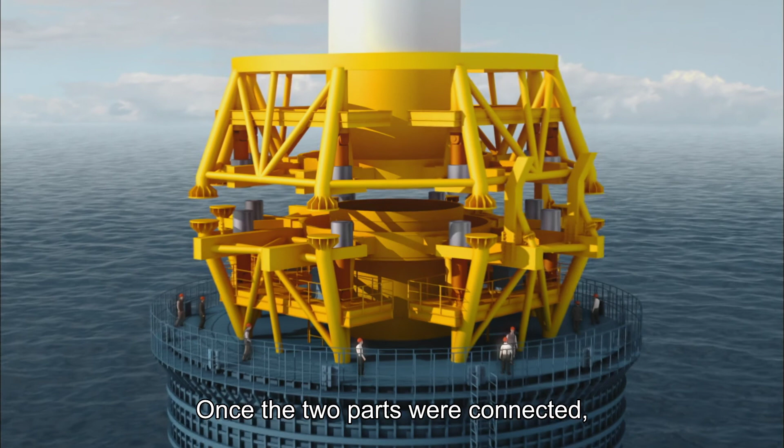The search for a solution naturally didn't start then. The installation department had already designed a docking device beforehand that would absorb the impact of collision. Once the two parts were connected, the wind turbine would slide accurately into the designated position. It sounded perfect, but the problem was that the device hadn't been used on a wind turbine of such large scale before. Would it guarantee success?

At 2 p.m., when the docking device came into contact, its effect came into play. The technology in the docking device used to prevent collision was strictly confidential, but they would soon find out whether it was effective. At 4 p.m., the tower slotted precisely into place.

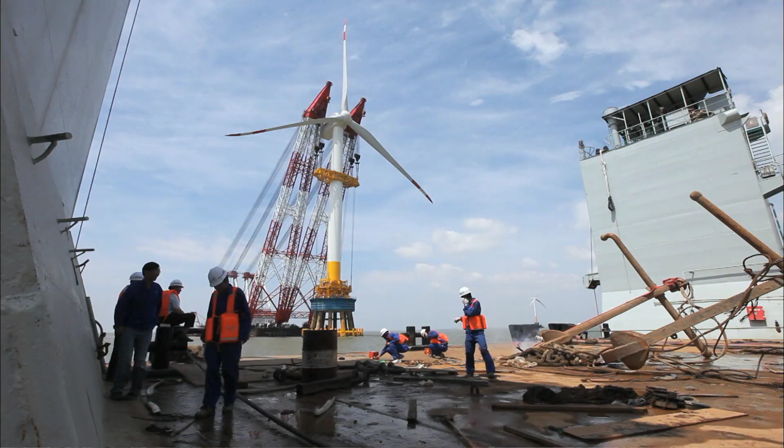Monitoring results showed that the base remained in place during the entire installation process. On the evening of the 6th of September 2011, the Sea Giant SL-5000 was erected firmly at the side of Donghai Bridge. It is a milestone in the West Pacific region, the symbol of a breakthrough in mankind's unprecedented application of wind power.